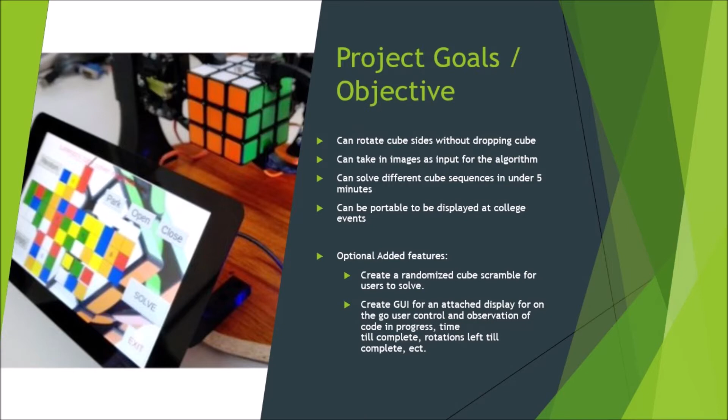We also had optional features planned that we would add if time permitted, such as an automated randomized cube scramble where the machine would randomize the cube for it to solve. We also thought it would be cool to connect a tablet and program a GUI that would display code as it is running and be able to send commands to the machine by touching the screen.

Why this design? From the start, we wanted to find a project that would be interesting to watch in action. While there are simpler Rubik's Cube solvers out there, we decided to use the design found on Instructables.com called ARS, Arduino Rubik's Solver, posted by supermarioprof. The main reason we chose this design is most of the structures are made of acrylic, and there are many mechanical moving parts which would make it interesting to watch as it solves the cube.

This project also had some documentation available online, such as the files needed to cut the acrylic pieces readily available, a collection of some of the algorithm code that would be used, and a list of materials needed.

The drawbacks of this design is the original project was made at a university in Italy, so the instructions were mainly in Italian and it was difficult to understand and translate. Another is that the pieces are made out of laser cut acrylic, so it's going to cost more in financing than other designs. Also, because of all the moving parts, we're going to have to spend more time on testing.

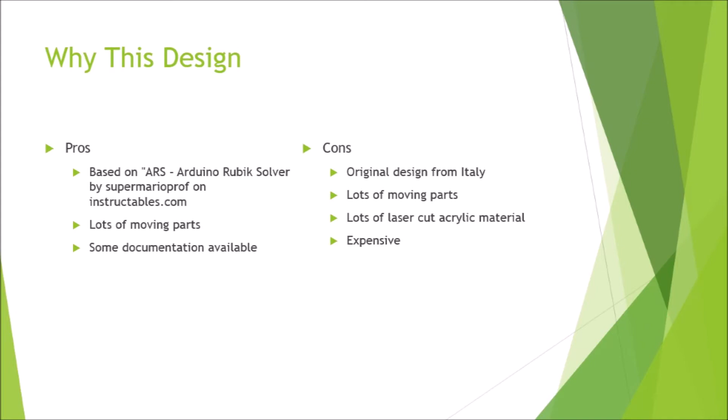While we did have the laser cutting files, we had to make all of the engineering drawings and 3D models ourselves. We used SolidWorks CAD software to make the drawings and models, and we also made assembly files to check for clearances and to make sure everything would fit together as intended. In total, we had 29 individual acrylic pieces to model.

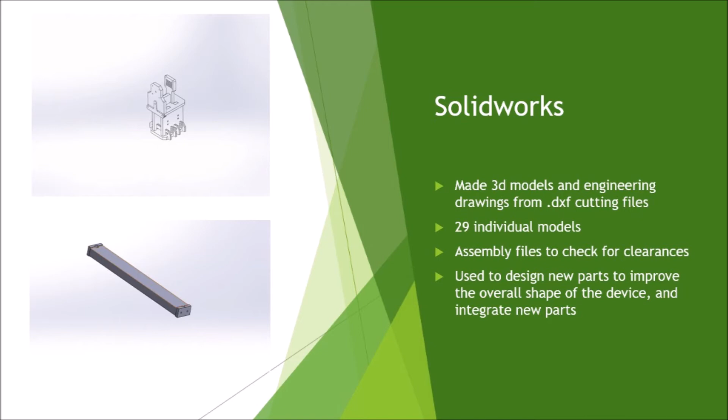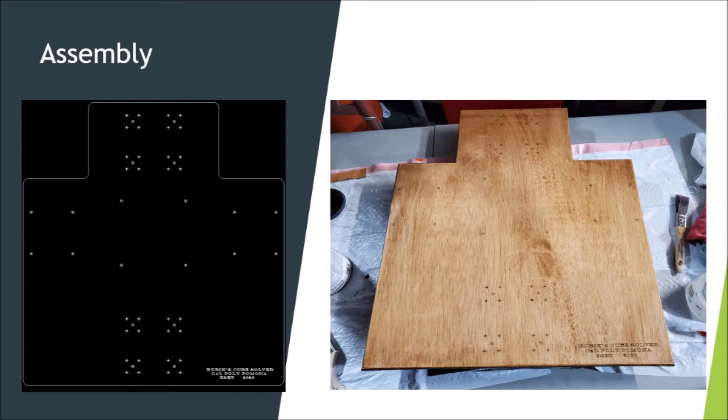We also used SolidWorks to redesign the mount for the camera. For the assembly of our project, we had a custom stained and scored baseboard, 100 individual acrylic pieces, custom fabricated metal rods with tapped ends, 3D printed pieces for the mechanical belts, cube manipulators, and camera mount, and it took about 40 hours to assemble all together.

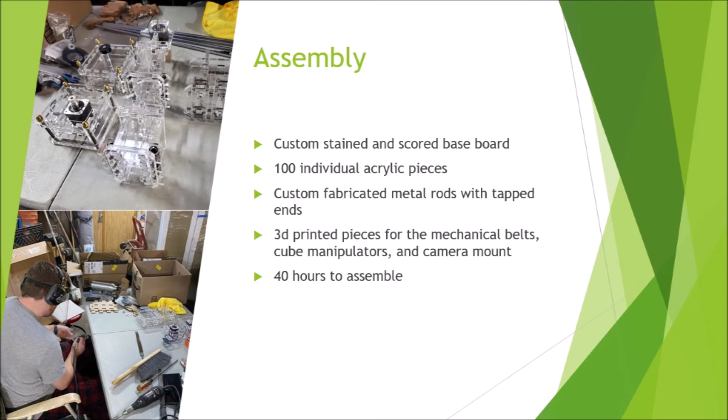The biggest delay we found was that the acrylic used in the original project was in metric thicknesses, and to get those type of thicknesses in the US would be a significant increase in cost. We decided to alter the design to fit imperial thicknesses that is readily available at places such as Home Depot. This slowed down productivity because each piece needed to be altered in SolidWorks and checked for accuracy. This redesign delayed the project 2 weeks.

Once the CAD files were changed and the acrylic sheets had arrived, we had the acrylic laser cut at a local shop. It took about a week turnaround. Once we started to put everything together, we found out that there were missing pieces and had to make a second order for laser cutting.

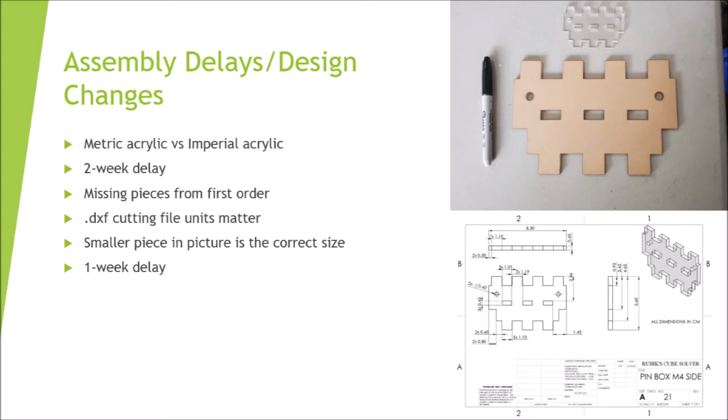During the second order, there was a mistake in one of the files where the units had changed from centimeters to inches and caused a dimension problem for the cut piece. The lesson learned is to always check units before sending files for fabrication. The top piece in the picture to the right is the correct size. The Sharpie pen is for scale.

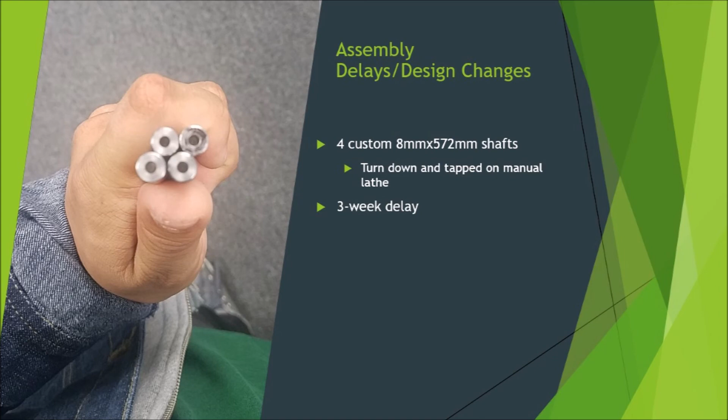In our project, there are 4 8x572mm shafts that hold up the motor structures that manipulate the cube. The problem we ran into with these rods is they are tapped at the end so they can be held in place. Turns out that buying custom shafts with tapped ends is very costly. Luckily, Julian is an experienced metal fabricator and had access to a metal lathe to tap the ends, but this added a few weeks delay for construction.

We had to modify the design a few times as we were putting it together. For all the sliding motor chassis, we found that they were unstable with just a force fit. We ended up using some extra acrylic as washers and drilled out holes for screws. This solidified the chassis and solved our problem.

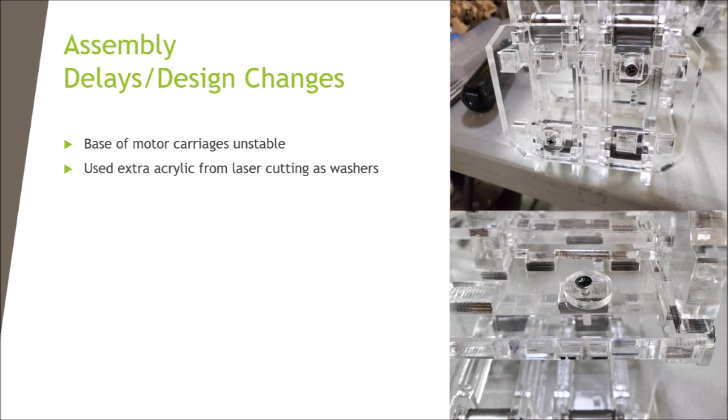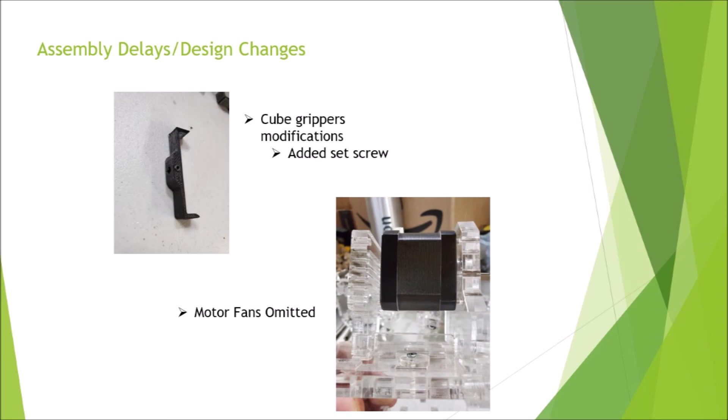We also had to modify the motor box housing. The motors we used had a little lip that sticks out just enough to keep the motor box roof from fitting all the way into place, so we drilled out an opening in the roof using a Dremel tool.